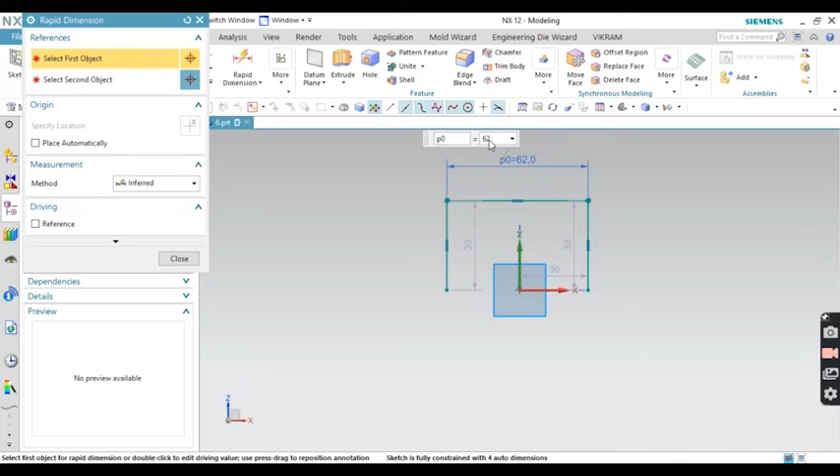So total distance you can see here, how much? 166. Then you have to define these values. You have to minus these values, then you will find that value. So the outside profile I'm going to create. So don't minus 10, just simply 166 minus 25 minus 25. What values you will get? 116.

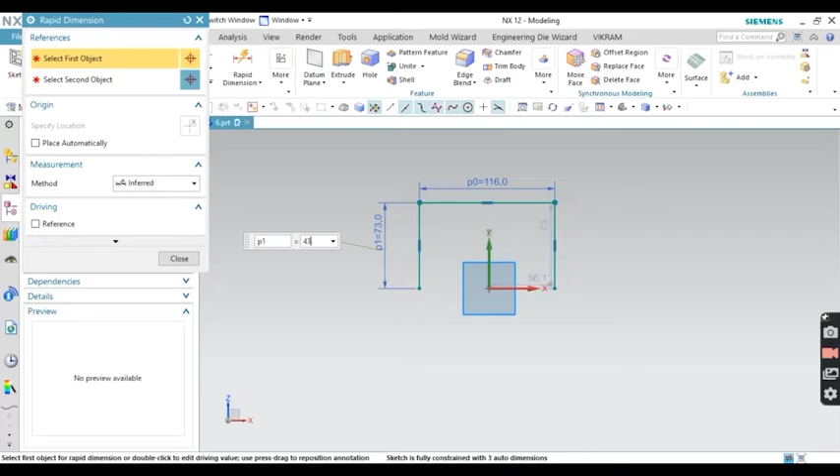Then next, what is the height values? Height values are given here, 43 plus 10. So total will be 53 mm. So just define 43 plus 10. What values you will get? 53 mm. So this side also you have to define 53.

Then next, if you want to align both center points, just align horizontally. Select carefully and align it in the horizontal direction. Next, make symmetry. It is already in symmetry mode, so no need to define; you can delete your symmetry constraint.

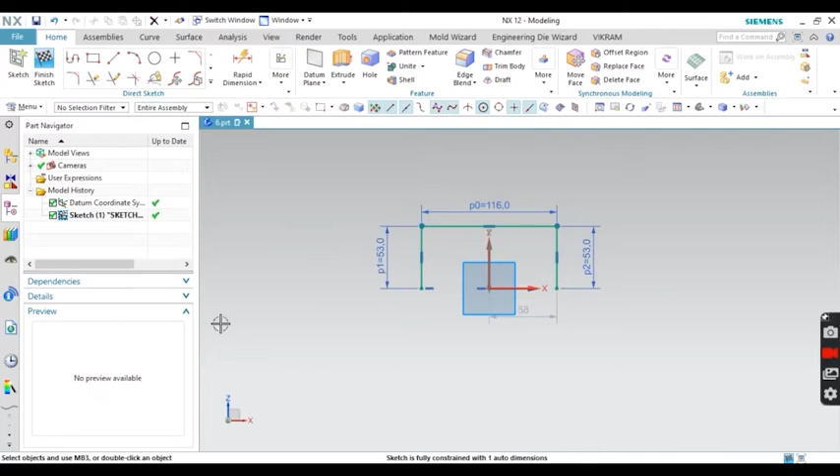Next, in top you have to apply fillet. So go for fillet and define the values. Radius 15 mm, because I am creating the outer profile here, so just define radius 15 mm. Now you can see your profile is ready.

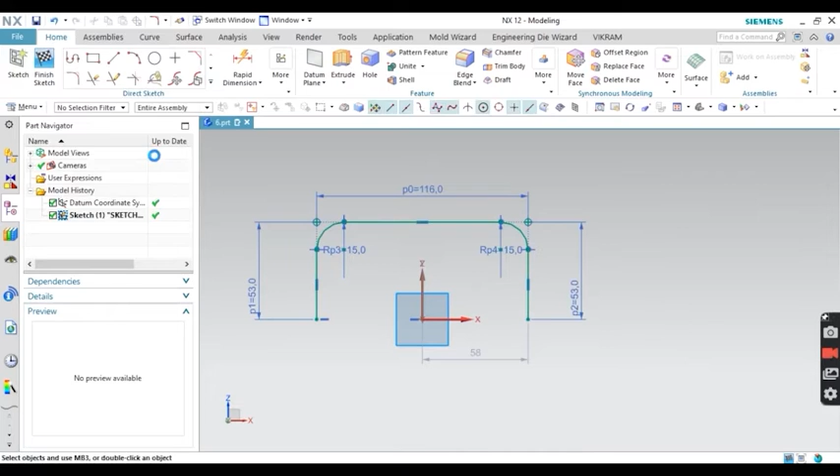Next I am going to offset it. How much are you going to offset? Just see carefully what is the value. 10 mm, you can see this is the 10 mm value. So just apply 10 mm, select a curve, select connected curves. 10 mm, I think this is okay. Just see preview, and click OK. Now you can see your profile is created.

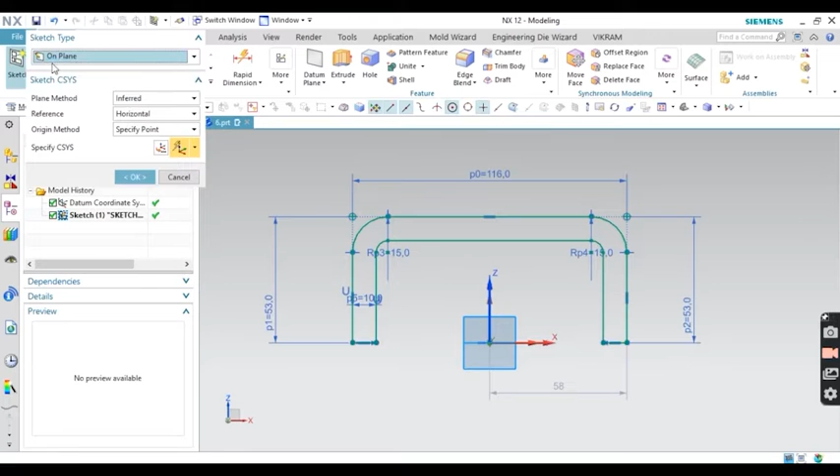Now you have to close your loop, because only a closed loop can be extruded as a solid. Just close it carefully. Finish your sketch first, and then you have to extrude it. Select your sketch. How much you have to extrude? Just go for symmetric and define distance values.

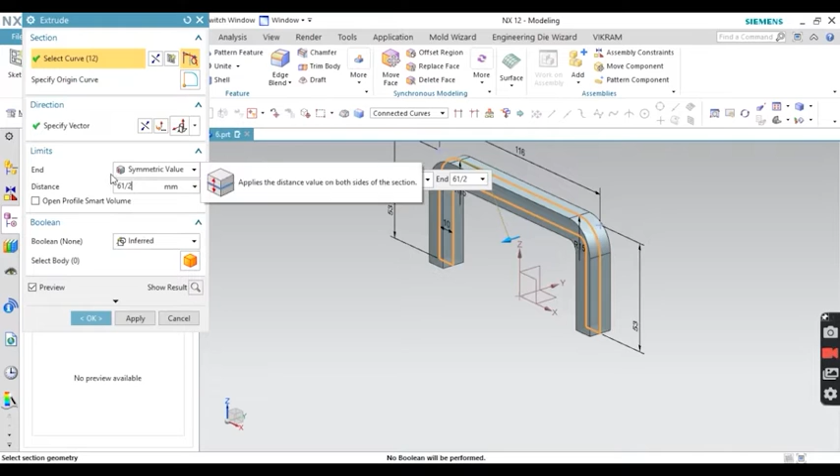What is the distance value? From the side view you can see. Actually we are going to extrude only the middle area. So the value is 61 mm, because we are extruding the U section. So 61 divided by 2, because I am extruding it symmetrically. Click OK.

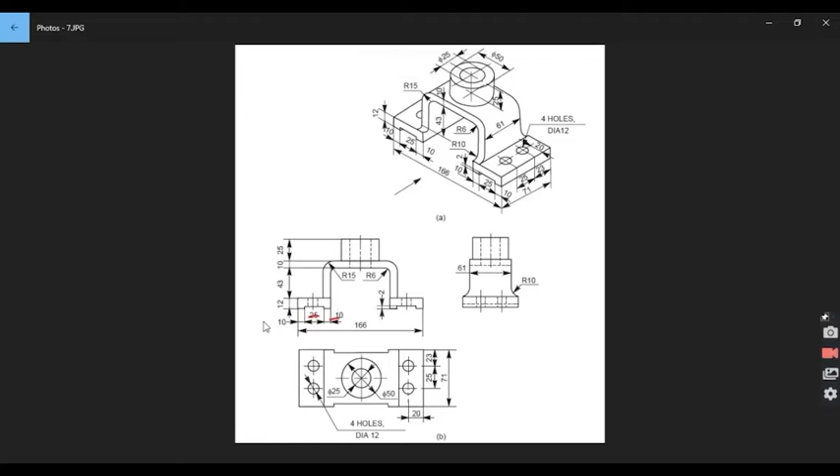Next what are we going to make? We are going to make this side plate. Just mark it, this section we are going to make. All values are given here. You can see 25, 10, 10, and this height value is 12 mm. With the help of those values, first create your closed profile.

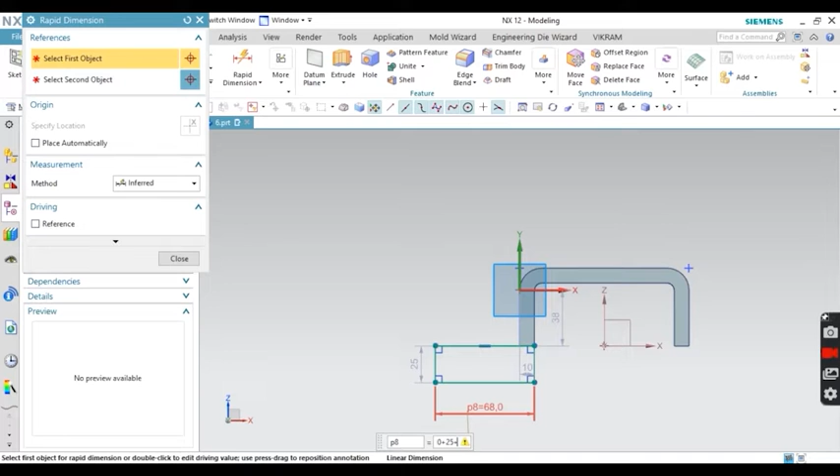On the front face I am creating here, not center rectangle. Just define corner rectangle and define this line length. What is the value? 10 plus 25 plus 10, total will be 45 mm. And this value, go to the drawing and see, 12 mm you have to apply. Just apply 12.

Then next, close it and apply positions. Just define coincident, or you can apply a zero distance. I am applying a coincident geometrical relation between all sketches and endpoints.

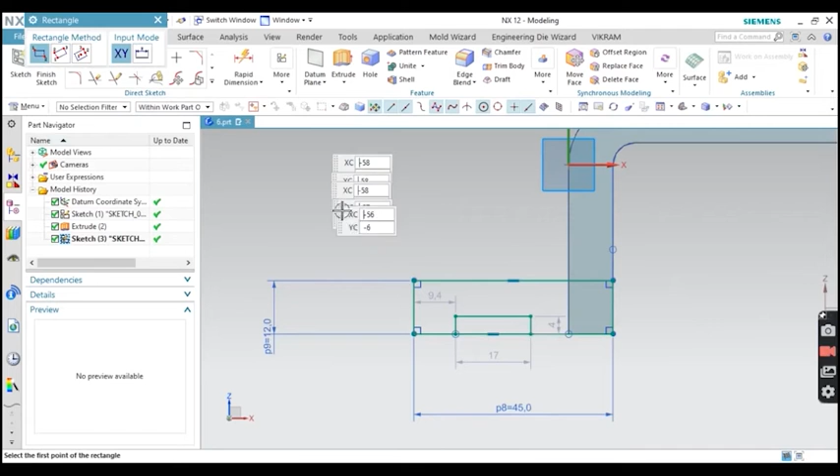Next, you see here a small slot is there. Length is 25 mm and width, you can see here, 2 mm is given. It is a very small value. So simply create a corner rectangle first and define values. I am creating a rectangle with length 25, and the width is 2 mm, as you can see in your drawing.

Now you have to make it symmetric, so I am creating a center line first. Just convert it to a construction line, or reference line, and now make symmetric.

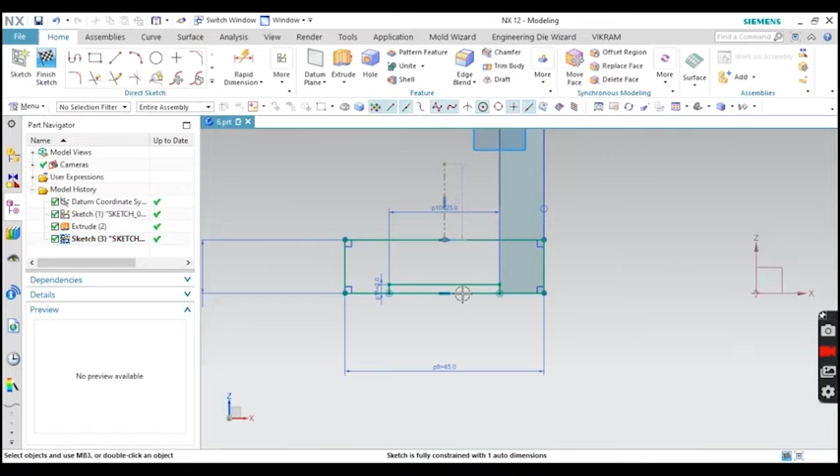Just select both lines and then select the center line. Now you can see your rectangle is symmetric. Now trim your unwanted sketches. This sketch we don't need. Now finish your sketch and now you have to extrude.

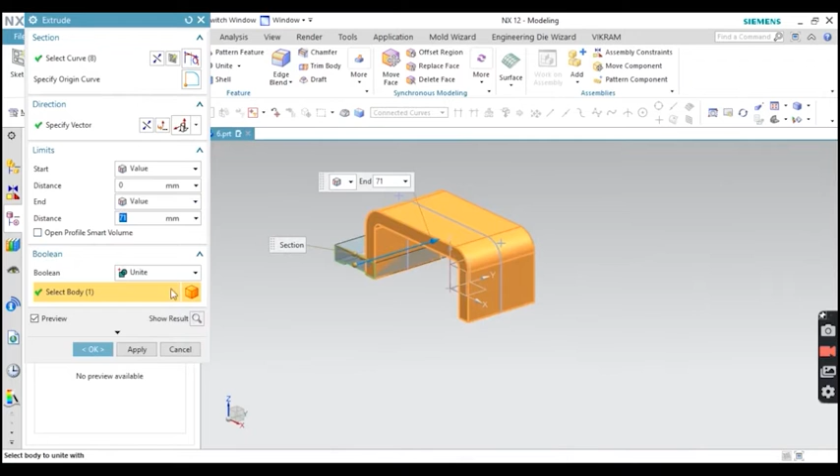Okay, so actually you have to extrude. Just go to the drawing and see once. We need this profile, but symmetrically we have to extrude up to 71 mm. So actually we should create this profile in the mid plane, because after applying 71 mm you can see the object is going outside. So no issue, I can project it.

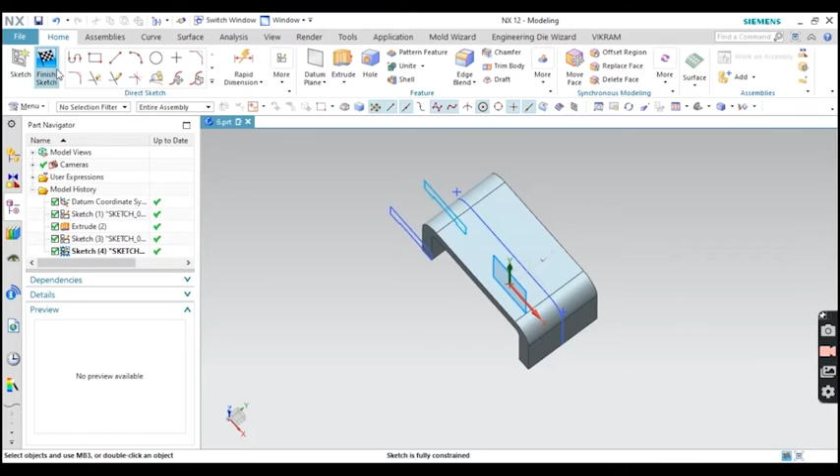Just go for a sketch on the front plane. Don't worry, just simply use project curve, select connected curve and select all curves, then click OK. Now you can see you will get all your curves in the mid plane of front. You can hide it and now you have the mid plane.

Now you can extrude it up to how much you need: 71 divided by 2. Just apply your values and unite it. Don't forget to unite. You have to unite this object. Okay, you can see.

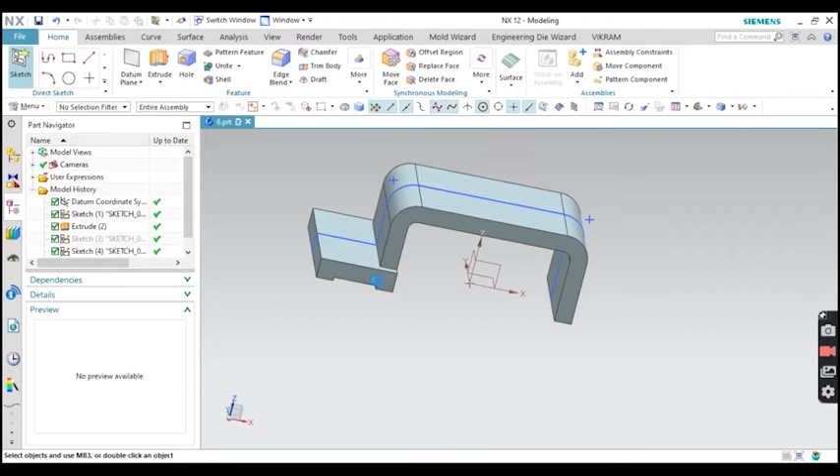So next I am going to create a hole with dia 12 mm. There are totally 4 holes. The hole position you can see in the top view, right side. Just create a circle, a simple circle anywhere. Now just apply dia 12 mm.

Now define the position. What is the position from this outer vertical line? The value, you can see here, is 20 mm. So just define 20 mm. Double click on that and define 20 mm. And then next you have to apply vertical, not horizontal. Just skip it.

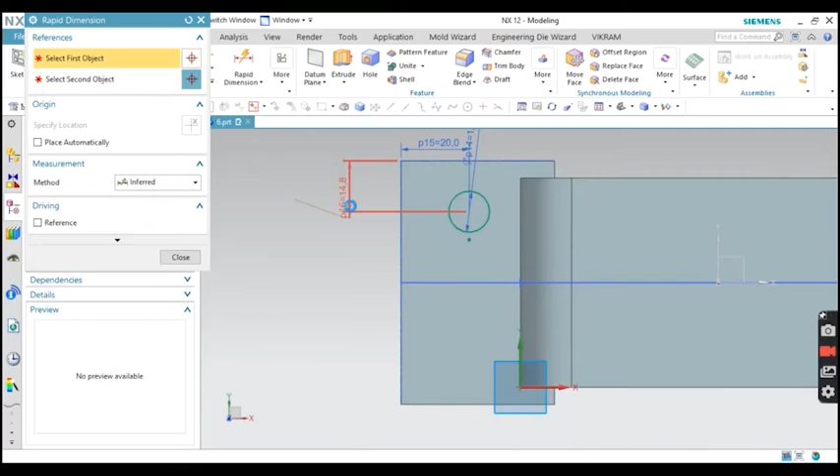Again go for rapid dimension and define this to this center point. How much do you have to apply? You can see 23 mm. So just define 23 mm. Okay, so now you can mirror your circle. Go for mirror and select your circle first, and then the center line. You already have the reference center line in the sketches.

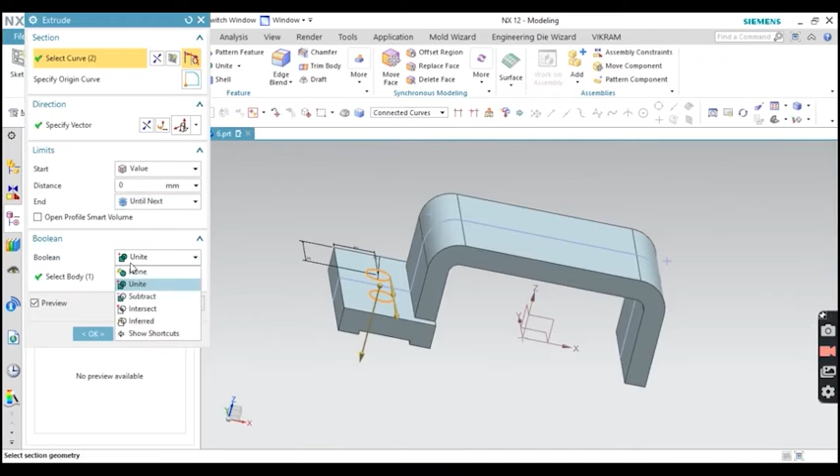Now just extrude cut, change your direction and subtract it until next. You can see here clearly until next. You can see this dotted line, it means through all. Through all you have to remove, so simply apply until next.

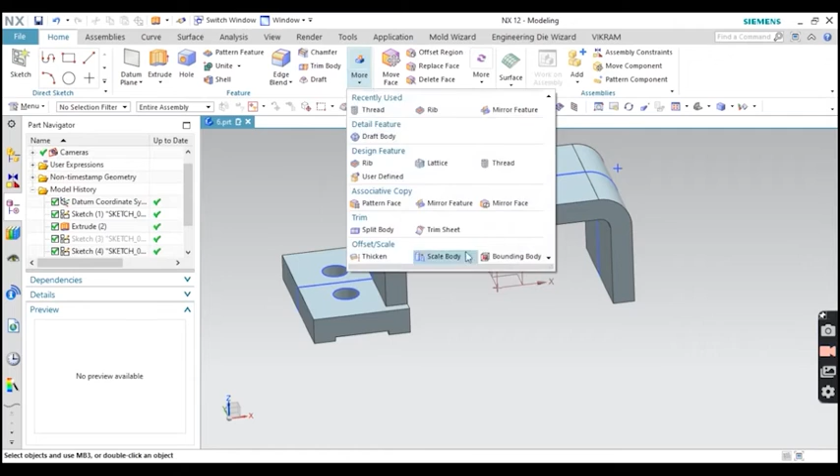Okay, so next, I already created this object, so we are going to mirror these features, because on this side also you need the same profile and same features. So go for more and select mirror feature, and now select all features carefully. This is the base plate, and also you have to click on this hole. Just a second, again click on that.

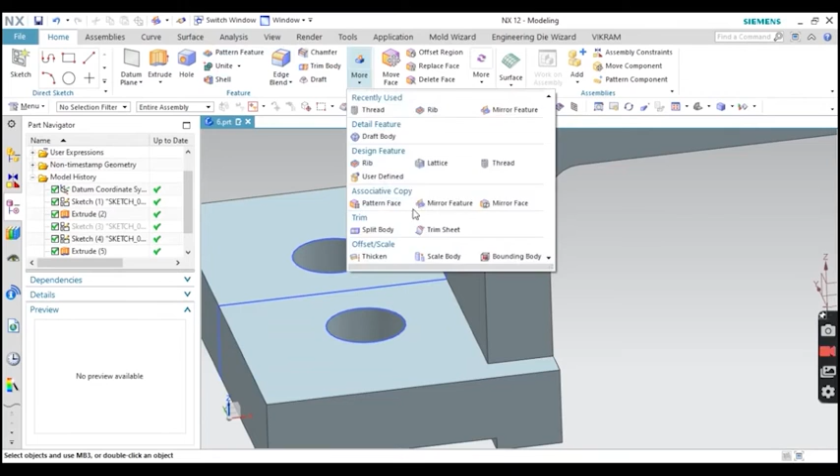Just a second, again go for mirror feature and select both features, because there are only two features, and select your mid plane and say preview, and then click OK.

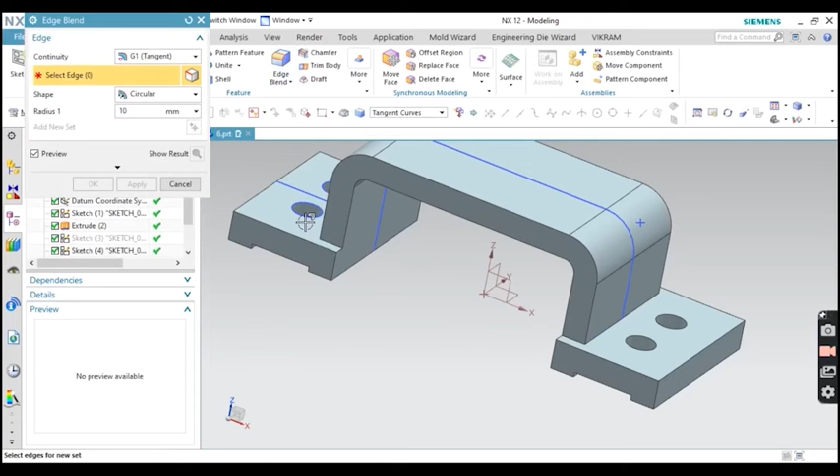Okay, so next, now you can see in this corner there is some fillet. Some values are also given. You can see in all corners the radius value is 10 mm. Just apply 10 and select all edges on which you need to apply the fillet. Just click OK. So your profile is almost done.

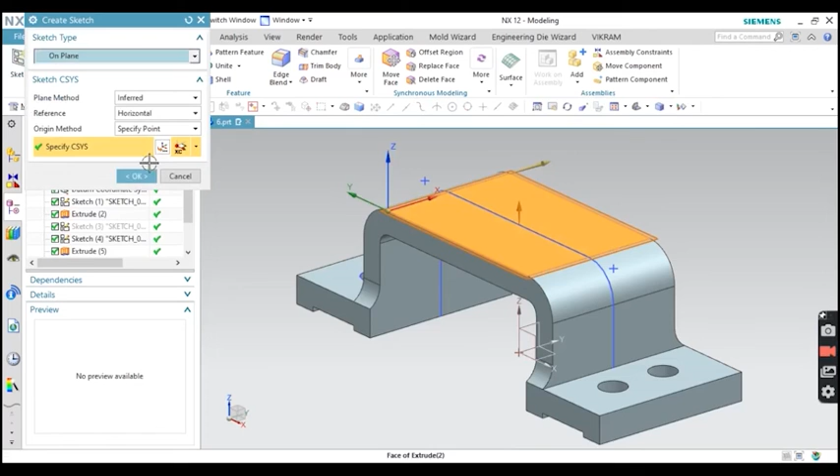Next, one more thing: there is a cylindrical object on this top face. So simply go and create a circle first, the outer circle, with dia 50 mm as given. Select a face. Now create a center. You already have centers, no need to define any position. Simply define diameter 50 mm. You can also create the inside circle, but you should remove it separately. I am creating both circles right now.

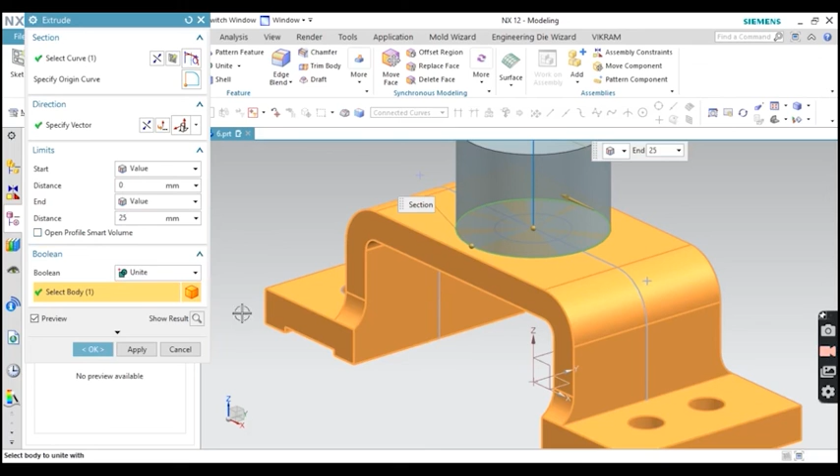Just extrude the outer circle first, only the outer circle, and don't forget to unite. You can see the value is 25 mm. So just define 25 mm, say preview. Okay, so next you are going to cut.

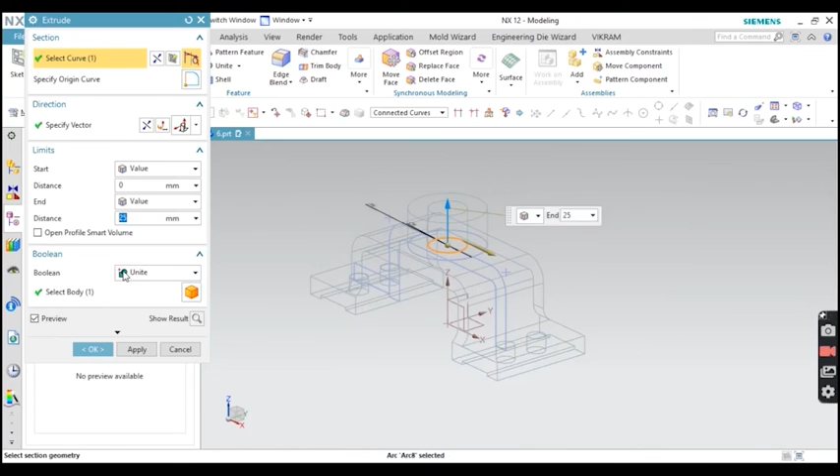This is a through cut. You can see you have to cut it up to the last. I already created this circle. So how will you select it? Go for wireframe mode, change your visualization to static wireframe. Now you can select your inside profile. Subtract in both directions. Just click until next in both directions, because at the bottom there is also one plate.

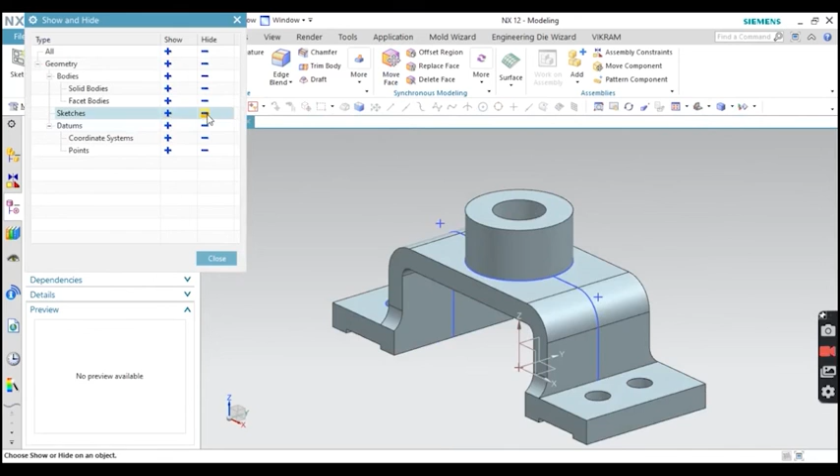Now change it to shaded with edges. Now you can see the hole is created. Just hide your sketches. Okay, so this is your isometric view. Okay guys, you can compare this isometric view to this isometric view.